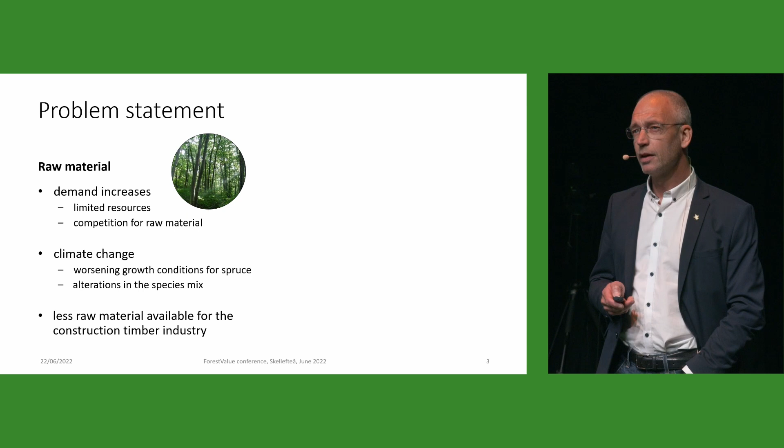So we may have less raw material available for the construction timber industry. That gives us a motive that we need to do the production very efficiently. On the other side, at the sawmilling side, we see it's more and more popular. We need a very good description of the material. We see also that almost all products going to the construction timber industry are required to be strength graded. And all in the area, we would like to produce it as efficiently as possible, of course.

Something not new, but growing year by year: we have been better and better in characterizing and measuring already at the log level with new modern techniques that we will use in our project. You will see that. So we will have data very early in the process when producing planks and boards. And as I said, the branch may need to look for alternative species also.

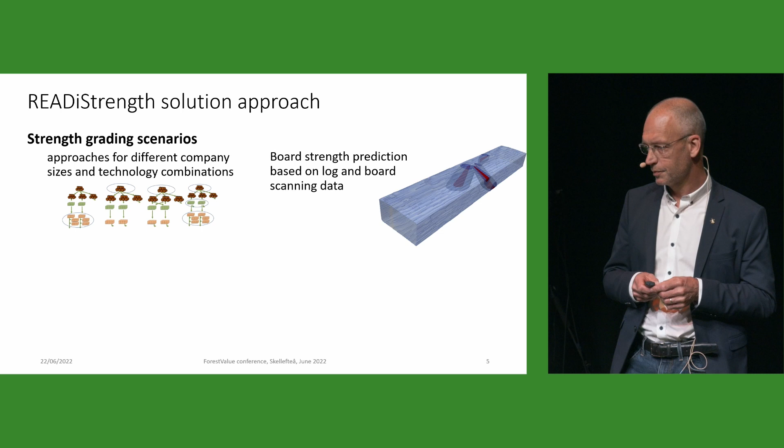So that is important. Our approach: we have looked through the arena of strength graded production of such products, and we will hear Anders talk later on a little bit about different scenarios, how to do this to make it more efficient, so that it should suit different sizes of companies. And our bearing idea is to strength grade early in the process, with the aid of such techniques as 3D scanning, acoustic scanning, discrete X-ray already at log level, and computed tomography.

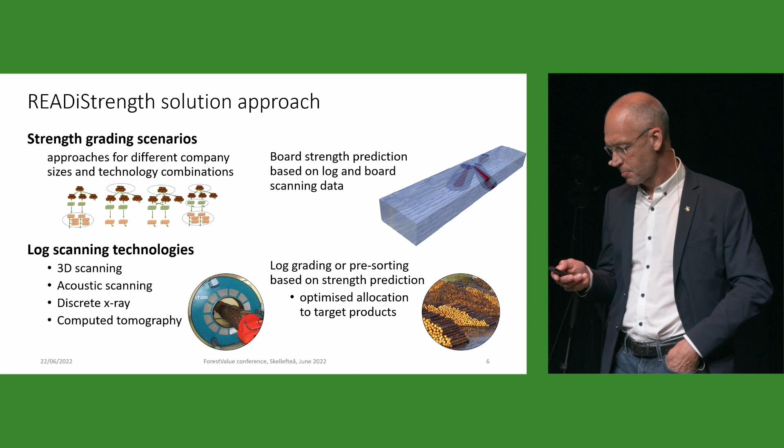So our main idea is: can we already at log level predict the outcome of the boards coming out from that log, the strength of the sawn timber? In that way, we think we can save material.

Just something about our data collection. It's a huge data collection. You don't need to understand this, but we started from the very beginning with logs, marking, and so on, and followed the production chain through the sawmill, even to the final product, and then strength tested it. And we made it in a way that we could keep the full traceability, that we knew that exactly this board is coming from that log, and that log has got those properties, and that board has got these features suitable or unsuitable for strength graded timber.

Just to get a grip, we had in total 420 logs followed, not on 2 continents, but up in Scandinavia and Central Europe, divided. In all, we had 1,200 boards. We had a similar distribution on 4 species. Of course, we had Norwegian spruce, the popular one, but also Scots pine, Douglas fir, and silver fir.

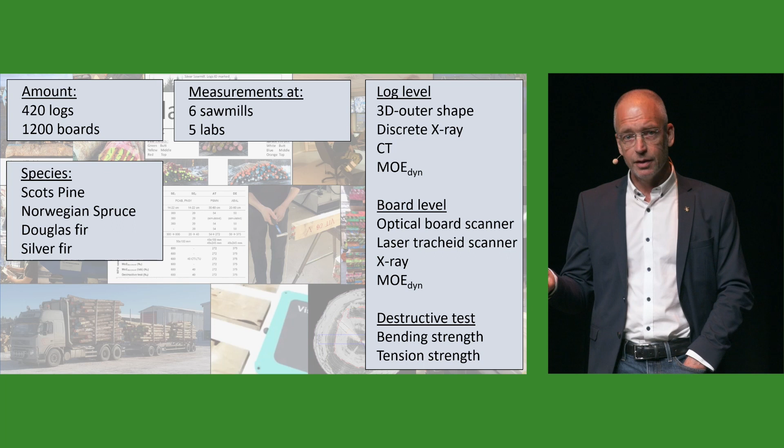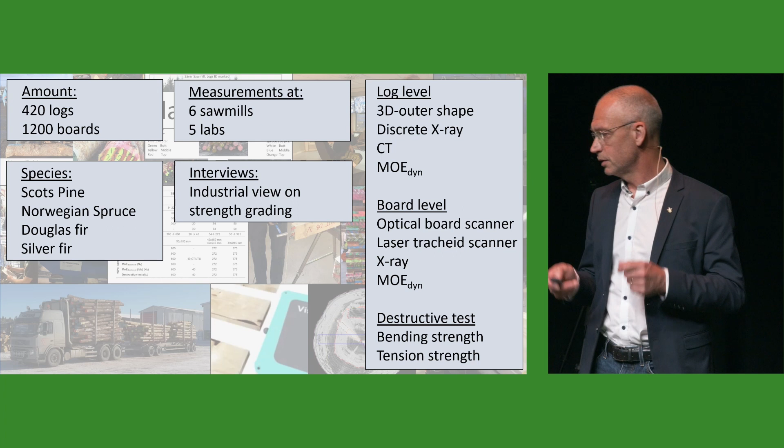In Central Europe, we had tension strength tests, and up in Scandinavia, we had bending strength tests due to practice on our market, so to speak. We also did interviews with the scanner supplier companies and also with sawmills about their thoughts about the future, and that is compiled in 2 reports at RISE. Recommend to read.

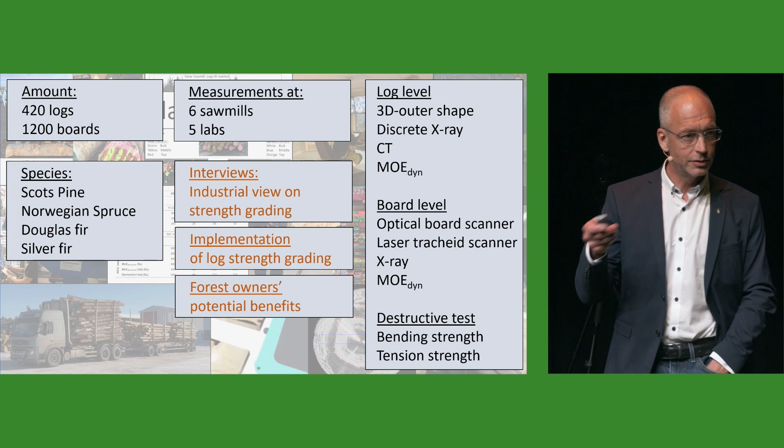What is coming next? Yeah, we will have the industrial perspective on strength grading in the next presentation. We will hear something about the implementation. Hopefully you will understand what we are thinking of doing here. We will hear something about the forest owners, how can they benefit from this? But in the second part of our project presentation, we go a little bit deeper and present also the prediction results and our attempts to show if it's possible or not. Yeah.

Then I give the floor, actually it's a recorded presentation by our industrial partner, Johan Oja. I hope it will work if I press on the...

Hello, my name is Johan Oja. I work as a technical manager at Norra Timber, the industrial part of Norra Skog, the Forest Owner Association in northern Sweden. I also work part-time as associate professor at LTU. Today I will talk about READiStrength, industrial need for more efficient production of sawn wood for structural applications. And even though I'm not able to participate at the conference today, I'm glad to have the opportunity to give this presentation in this way instead.

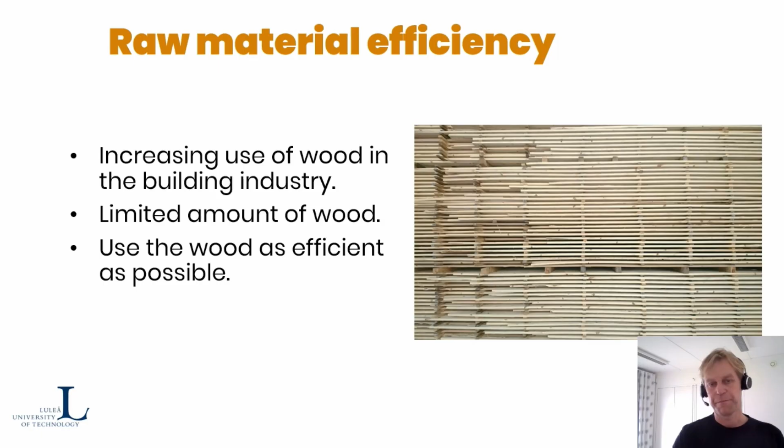So the background for this project is the need for raw material efficiency. We have an increasing use of wood in the building industry, and we want this to increase even more to exchange concrete constructions to wood constructions. But we also have a limited amount of wood, and that means that we have to use the wood as efficiently as possible, of course. The problem when we want to utilize wood in an efficient way is that wood is, as you know, a biological material. That is, we have a huge variation of properties. Every log, every tree is unique, and thereby we have to find the best way of utilizing every single log.

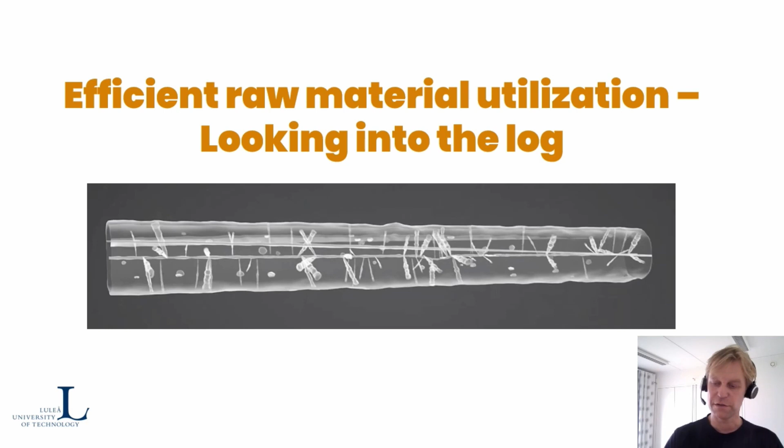And the example of how we can make money from this is that we can look at the potential dimensions that we can cut from the same log. We say that we're able to cut dimension A and B. They are both geometrically feasible for this size of log. But if we cut dimension A, the customers want high strength material. They want it dried to low moisture content, and they can pay a really high price if they get this value. But if it's a reject, if the board doesn't have this high strength, then we have dried it to low moisture content, and we don't have a demand for this dimension with low strength.

For these logs, it would have been better to cut dimension B, because here we have a standard quality that fits most of the boards in this log class. We can dry it to normal moisture content, and we get a decent price. And for the reject, we get a lower price, but we still have some demand for the reject. So what we would like to do in the sawmill is to find the logs that will produce the high strength and cut dimension A and dry it to low moisture content. And the other logs we would cut dimension B and produce standard and reject. This would give us the best value.

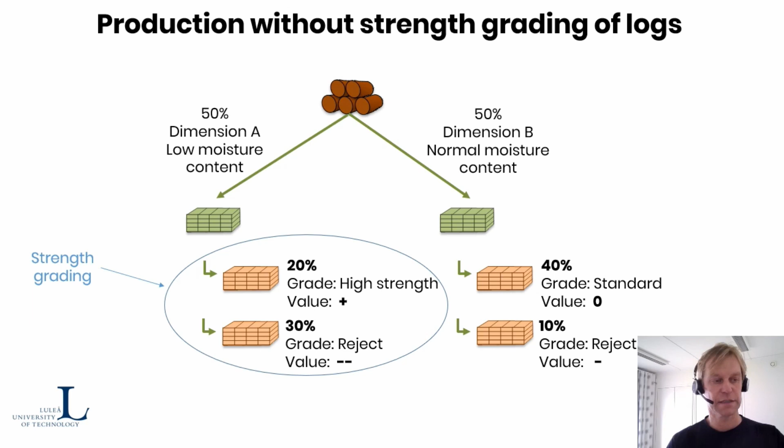And this would be in a typical situation where we would cut 50% dimension A, 50% dimension B. You can see from dimension A, we get 2/5 of high strength, and the rest 3/5 of reject. And for dimension B, we have 4/5 of standard and 1/5 of reject. This means that even though 40% of the total volume has high strength, we only get 20% out as high strength lumber.

But if we're able to perfectly choose the high strength logs, we can find these logs, which is 40% of the total amount of logs. We strength grade those logs and are able to cut dimension A. And then we will produce only high strength value for these. So we get 40% instead of 20% of the total material as high strength, high value material.

And the rest of the material, 60%, is cut to dimension B, where 48% of the total flow will become standard instead of 40 as before, and 12% is the normal reject in dimension B. In total, this will give a much higher value with none of the lowest value, the reject in dimension A, and a high amount of high strength lumber in dimension A, giving us a much better value, much better utilization of the logs. And this is what we have tried to achieve with the READiStrength project.

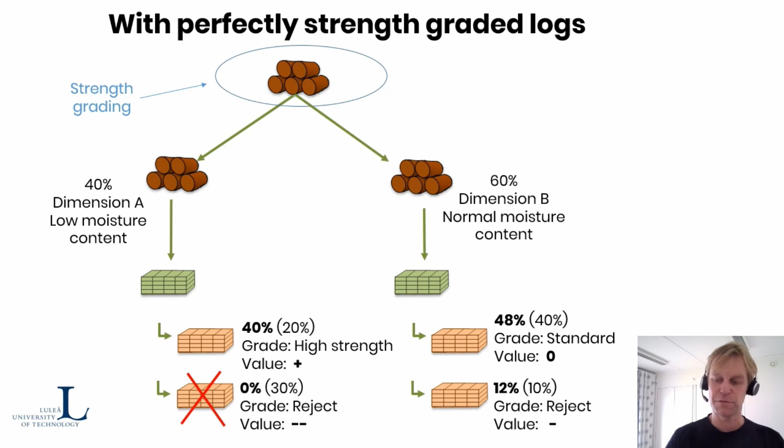And that explains pretty well, I think, that if we can use that information already at the log level and predict the strengths, then we can save material. And now I try to have some small dialogue with my experts here in the sofa. Anders Lycken from RISE, where are we now concerning these different sawing strategies and strength grading strategies? I know that we have worked with it, and you will try to explain a little, because it's not that easy for newcomers. Yes, I'll try to explain very briefly how strength grading is done today and how it might be done in the future.

You can see here that in traditional strength grading, you pre-grade the logs according to length and diameter, and then you saw the logs into boards. You have a green sorting where you sort again to dimensions. You dry it, and you have the final sorter where you do the actual strength grading. And then, as Johan said, you have a lot of rejects, but that's how it's done.

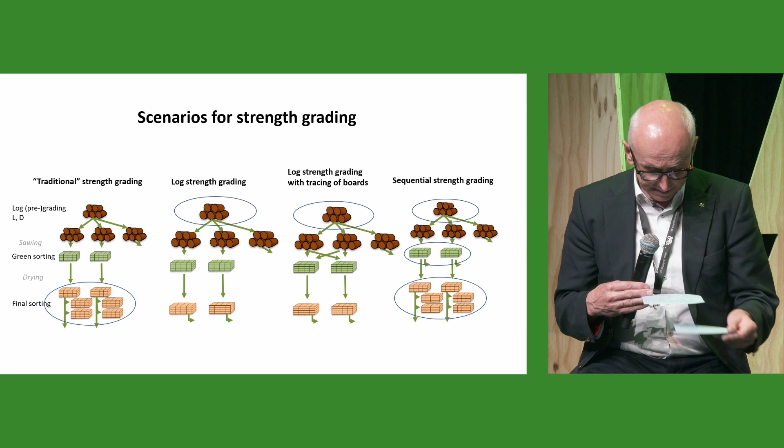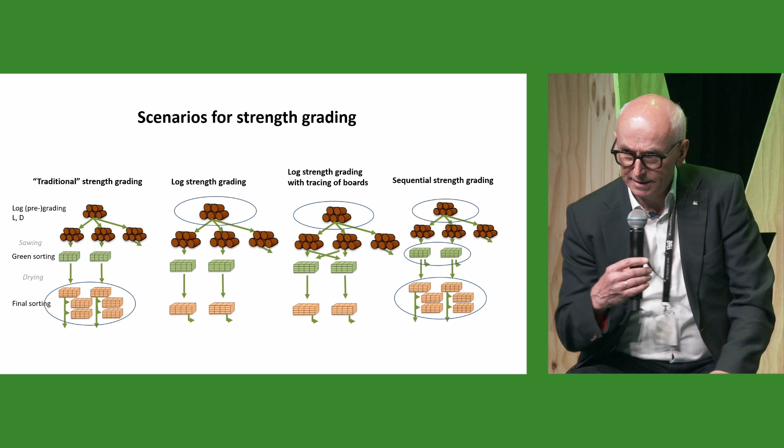And the last thing, especially for me, with a long experience in that, is very important. From my point of view, it is very important and necessary to implement a kind of neutral resource quality determination after felling, but before sawing the log. And I'm referring to the system which is already established here in Sweden. You are lucky guys, and this is not yet the solution in Middle Europe, and we have to implement such a system. And the reason is pretty easy. Otherwise, we cannot really expect that the forest owners will react as we expected.

Thank you, Udo. So to summarize, if the sawmill is doing it better, more efficiently, they earn more money and they can then pay the forest owners. And that was not a question. Sure. Just a comment.

Andreas Weidenhiller, HFA in Vienna, Austria. You led the Austrian part of READiStrength. Are these options that have just been discussed also interesting for you in Austria? What is the situation there? Yes, definitely these options and scenarios are also interesting for Austria. I don't know if everyone is familiar with the fact that Austria, despite being a rather small country, is one of the biggest producers of sawn timber in the EU, together with Sweden, Germany, and France.

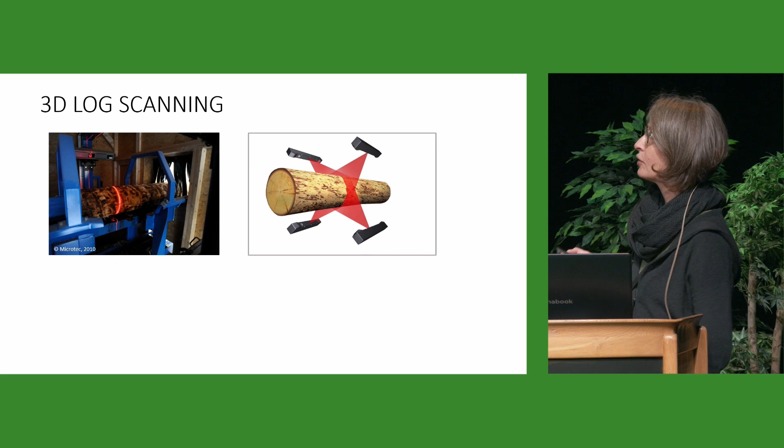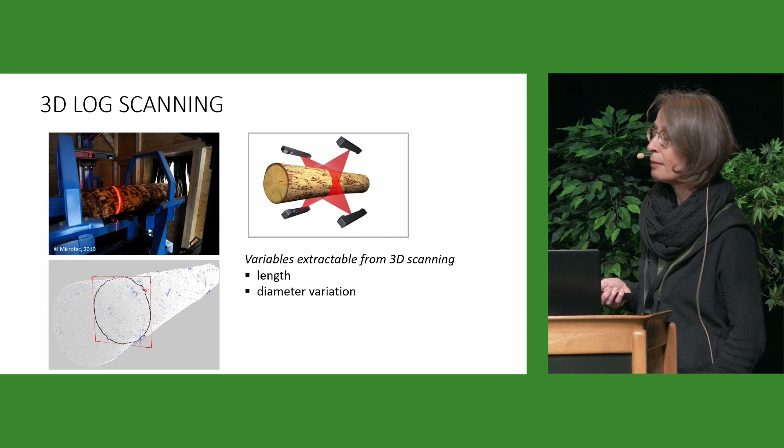So the first one, very widely used in the sawmilling world, is 3D log scanning. The idea is that the log runs through a frame. We have either a light curtain or laser cameras, and from these measurements we extract a point cloud describing the outer shape of the log, and from that we can extract variables like length, diameter variation, and from that taper, ovaliness, bumpiness. So it's the outer shape as such which is described.

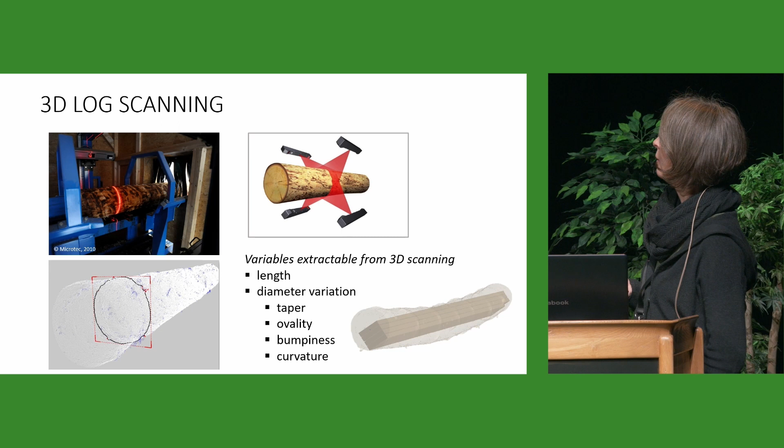And having that shape, that geometry, we can then put the boards in there and draw relations to the strength measurements that we've done on the boards. So each board I'm talking about had been destructively tested, and tested also for density and for MOE.

So the second technology, which is more used here in Scandinavia, and I don't actually know of any installation in Central Europe, is discrete X-ray log scanning. So again, the log runs through a frame, and we have 1 or 2 X-ray sources installed, and what we receive from this technology are kind of silhouettes; for each of those two sources, we receive one of those two-dimensional representations.

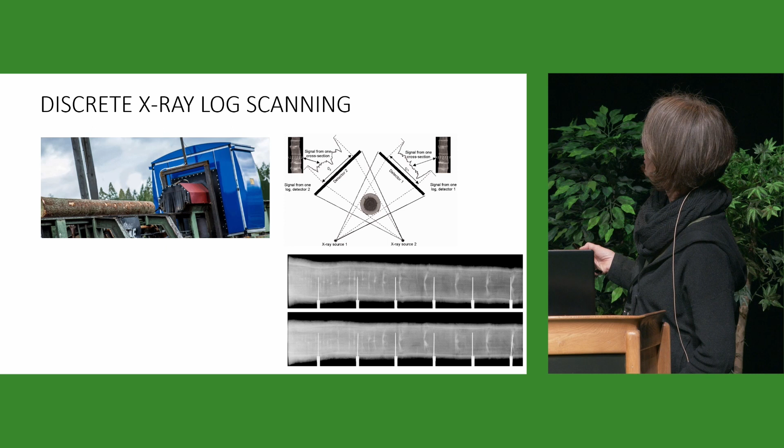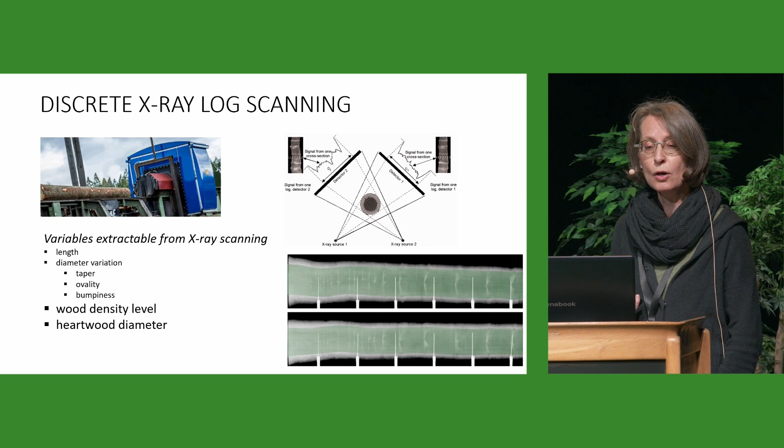And from that data, again, we can extract the geometry of the outer shape, but we also receive information on the wood density levels. And wood density is very closely related to strength. So the information that we gain here is already very important, because we do see some patterns in the distribution of density. So we can extract heartwood diameter, for instance, or the position of whorls or knots and their sizes.

If we then go further into technology, that is the most advanced technology that we were able to use, and there are about 10 to 12 installations worldwide of that technology. And so we are lucky to have one here in a sawmill, and in Freiburg we used a prototype which is actually a little bit of the basis of these industrial installations.

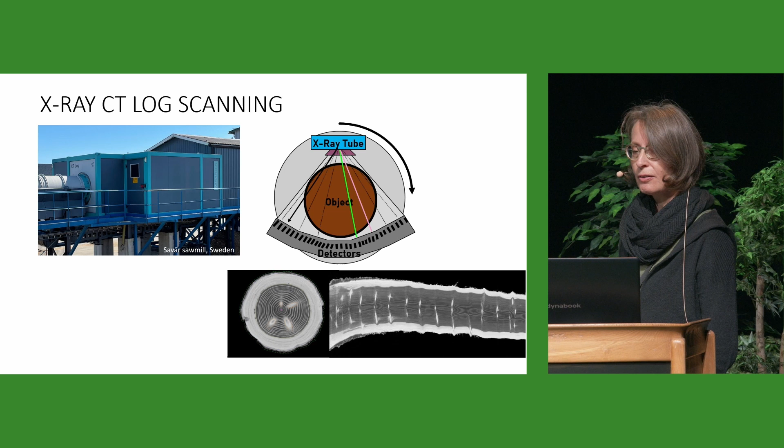So the difference to other X-ray based technology is that we have an X-ray source which actually travels around the object while the log is moving, and the result from that is not only one or two planes which we are looking at, but we are able to look at several hundred individual planes, which are then recalculated to a proper 3D representation of the log internal structure, as you can see here in the cross-section or in the axial length. And from this, again, we can extract all the external data.

We can extract the wood density level in much more detail, as I've shown in the image before. So we can find the actual precise position of knot structures. We have information on the status of knots. So the level of detail of information is higher than with the previous X-ray based technology.

So we collected a lot of individual parameters from each of those three technologies. In Sweden, statistical approaches based on partial least squares analysis have been applied. In Germany and Austria, we used a different approach, generalized linear models, for the modeling. All the data sets have been split up, as you would do when you build models, into training data sets and test data sets, with 10 replications. And I would like to present to you now just the model qualities which we can achieve from the different technology concepts. So that's the example for Norway spruce.

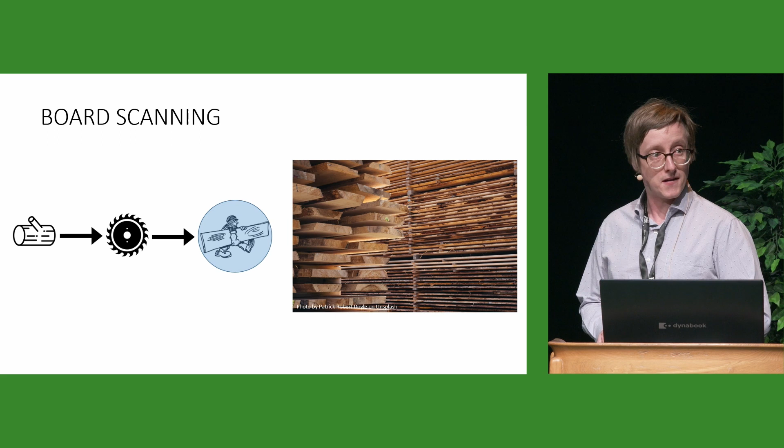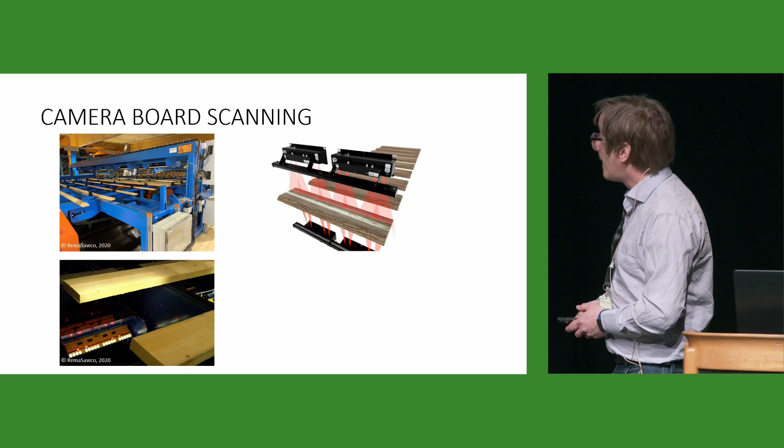And as we said in the beginning here, this is where the strength grading usually takes place, where we have the sawn boards, and in our case also the dried boards. And we don't want to talk too much about how it's done today, because that's not very interesting from a research perspective, but we will talk a little bit about the technologies being used, since this is where we have based our data collection on. It's these type of scanners.

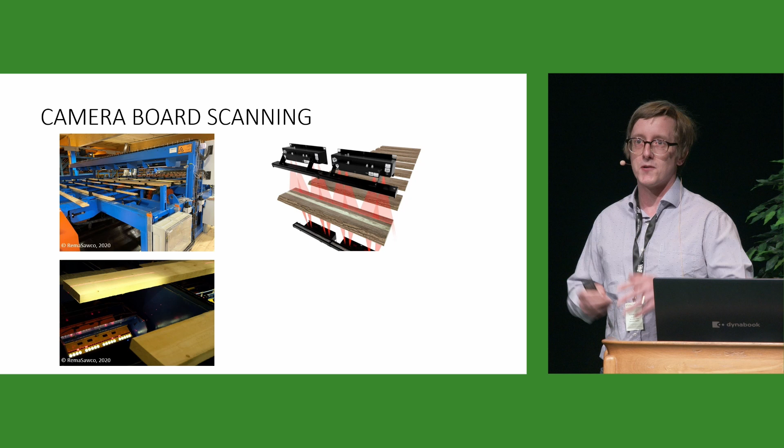One type is you use camera board scanning to run the boards through a frame with cameras on top and below, usually. And you have projected laser lines, so you can do laser triangulation and measure the shape of the boards, and the cameras pick up the RGB channels, so you have basically a picture of the board.

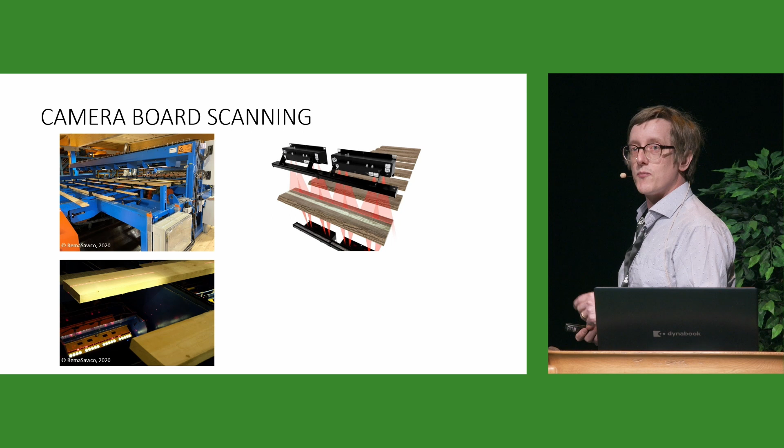And I'm not sure how visible it is here, but if you project laser points in a line, you can also measure the fiber direction of the board. Because the laser light will propagate in the fiber direction, so you will get kind of elliptical laser dots, and you can measure the shape and the direction of these ellipses, and you can tell something about the fiber direction, which is of course very important for the strength.

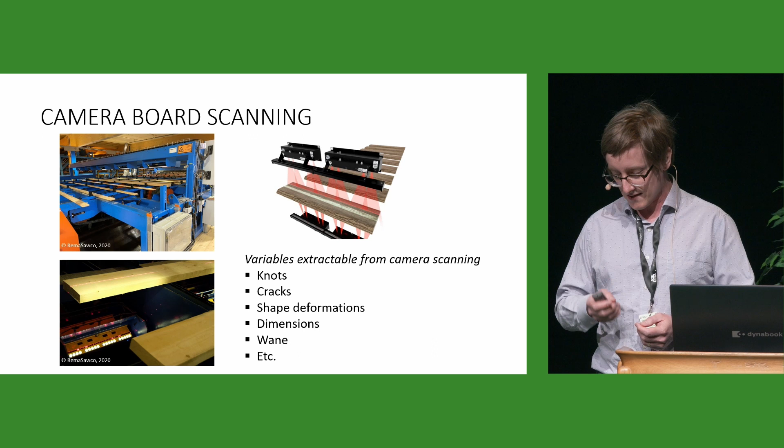So a few things that can be measured. There are a lot more characteristics, of course. Not all of these are relevant for the strength as well, but these are some of the examples. I mean, knots and the fiber direction, I would say, are the most important things here when it comes to camera board scanning.

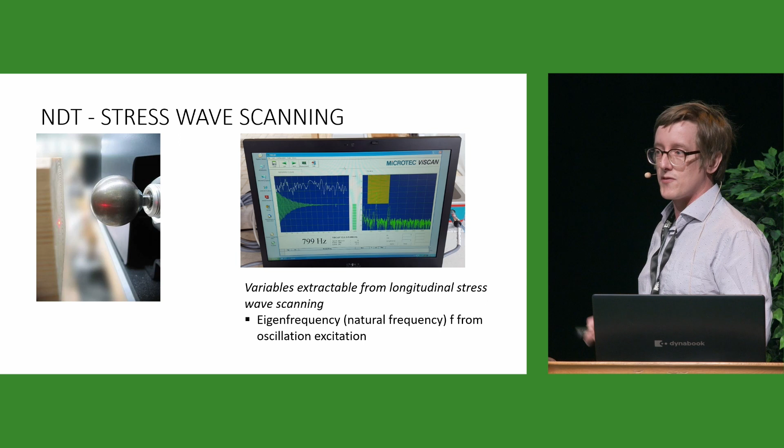You can also do this stress wave scanning, where you use kind of a hammer to knock on the side of the board. Most of you know this. So you can measure an eigenfrequency of the vibration, and if you also know the density of the board and the length, you can measure these in some other way. You can measure the length quite easily with a laser scanner, for instance, and for the density you could use scales and measure the volume, or you could use an X-ray. Then you have sort of a function deciding the modulus of elasticity of this board.

And we also have X-ray technologies on the board side. For instance, we don't have an image of this, but you can of course scan the board as well to get X-ray data describing the density and the knot information and so on. So that's already known technology, so to speak. It's in use in many places.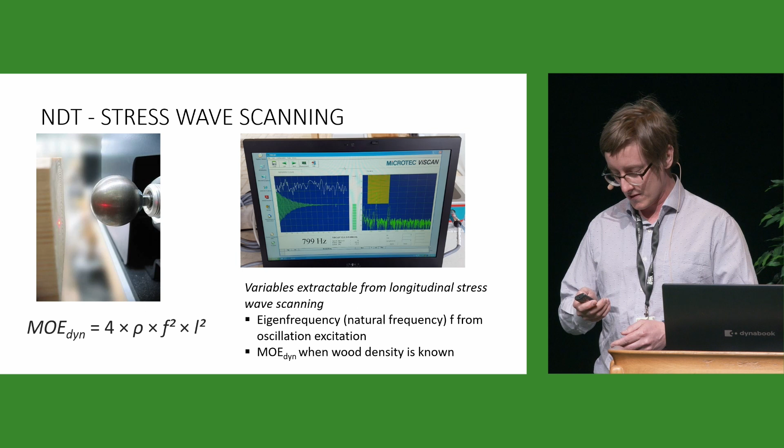So what we wanted to do is look at what is coming now in the sawmill, what is kind of the forefront of technology, and we described it a little bit in the beginning of this presentation. If we can have traceability and actually combine technologies from different parts of the sawmill, because the difficulty in a sawmill is often that the material gets jumbled about, it gets sorted, it gets resorted and so on for various reasons. Especially for the drying, you have to basically resort the material to have an efficient drying process. So it's very difficult at this stage.

Let's see, where is it? Wrong button, sorry.

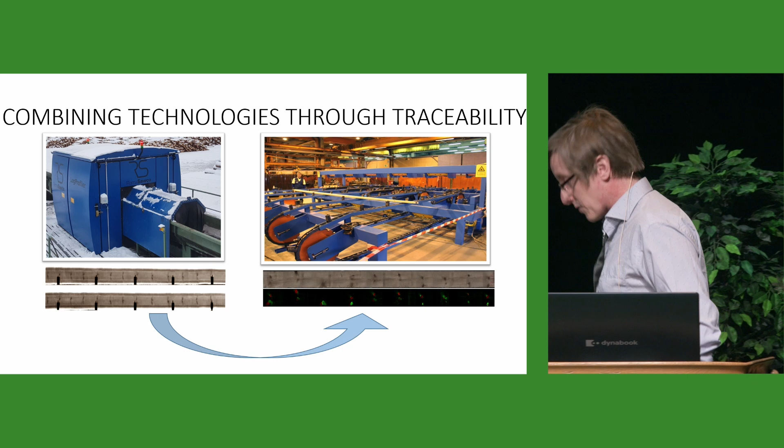At this stage, where you have the board, it's very difficult to know which log it came from, because you can't really keep track of the pieces. But what is being used in a couple of sawmills at the moment and being installed in more and more is this fingerprint traceability technology where, if you have an X-ray scanner for the logs, you can see these vertical darker areas which correspond to the knot whorls in the log.

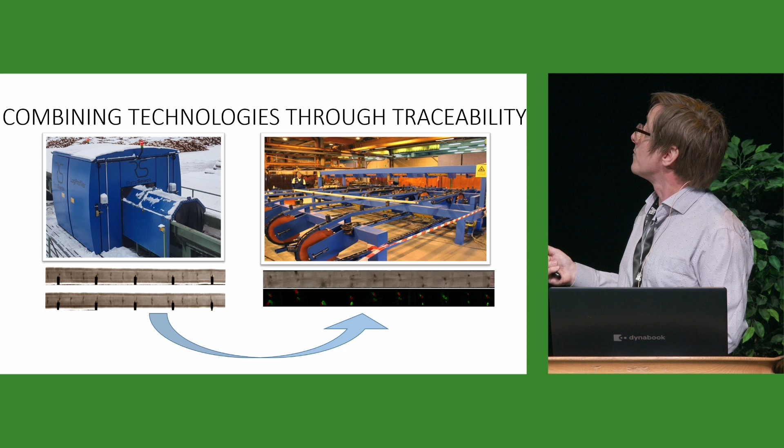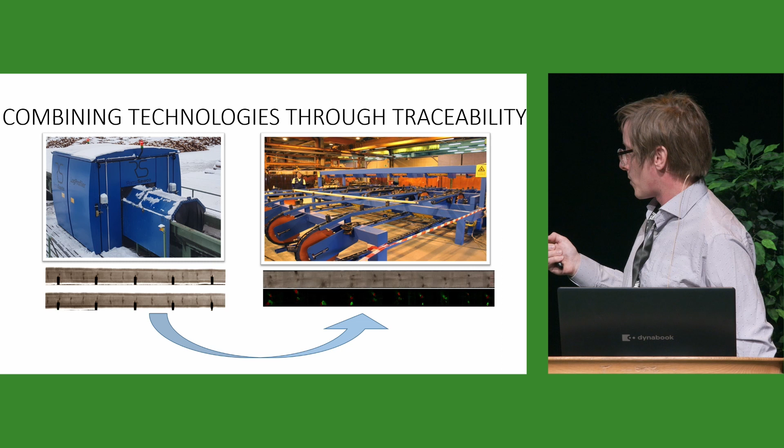And you can use this to create kind of a biological fingerprint of the log. And you actually measure basically the same thing on the boards later. You measure the knots again, and you can create a similar fingerprint, and you can match this to retrieve the information at the board stage. And we wanted to see what we could do with this, and the idea was if we can feed forward the information from the log side when we do the prediction on the board side, can we improve it? That's the question.

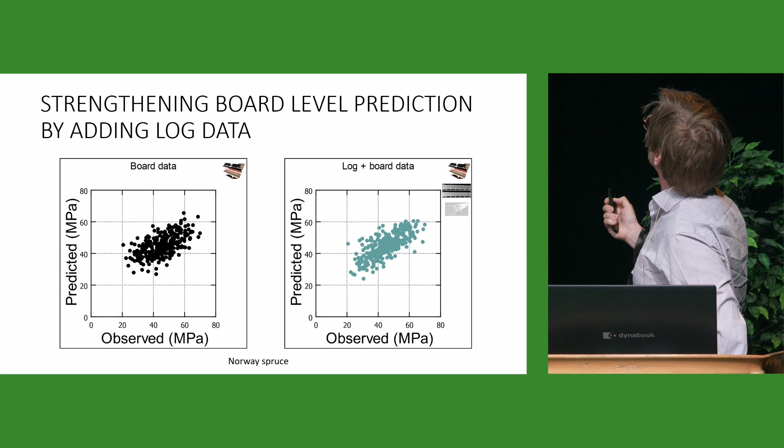But if we think that we can trace the board back to the log and add the log information, because then we have taper, for instance, and we have things that indicate the log type, if it's a butt log or a mid log or a top log, or we have other things. In this case, we also add the density from the X-ray scanner. Then we can see quite a large improvement in this cloud. So in this case, we have added the X-ray and 3D data from the logs.

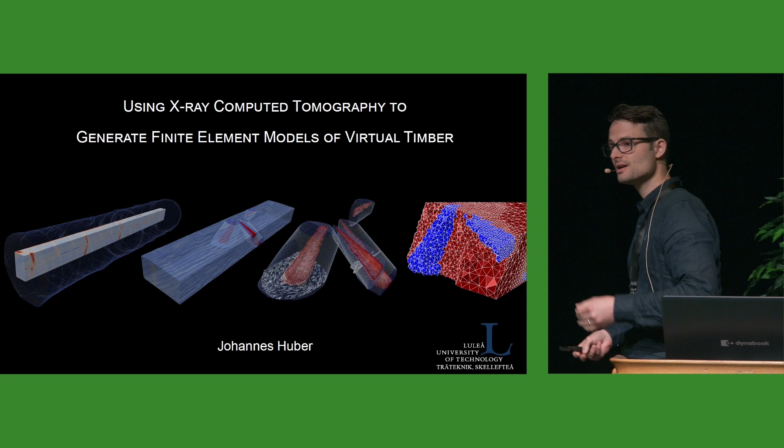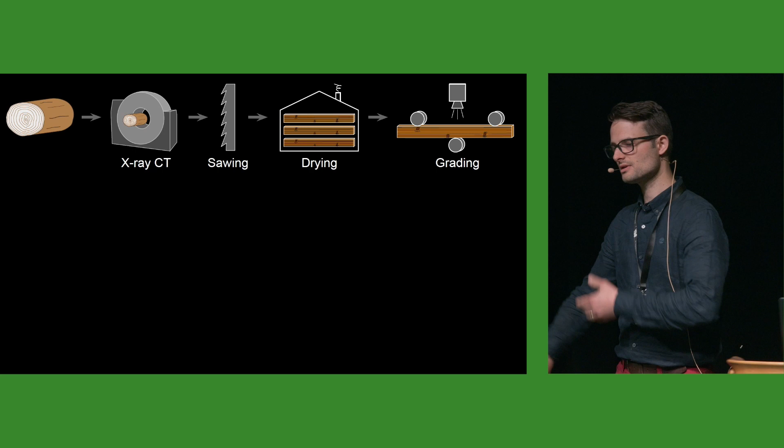And I was going to talk about using X-ray computed tomography data, so it's the one you know from the hospital, right? To generate finite element models of virtual timber and then predict certain properties. So this is what we envision in a perfect scenario here. We have a sawmill process, very simplified. The log comes in, we scan it, we saw it, we dry it, and so on, and then we do some grading. And nowadays, this grading is based pretty much on statistical models, statistical correlations to predict certain mechanical properties.

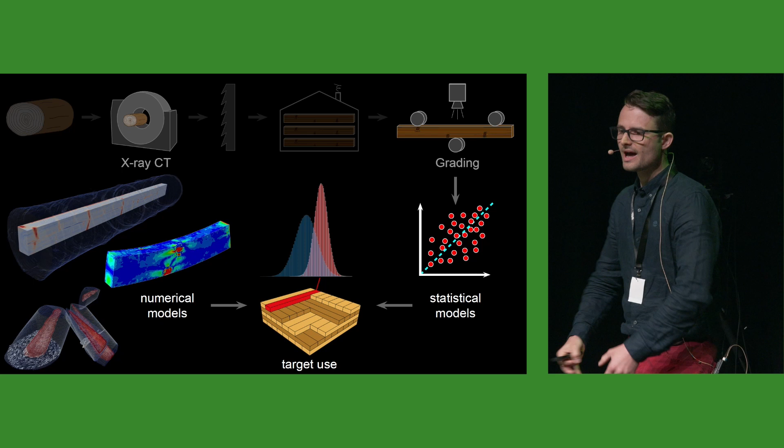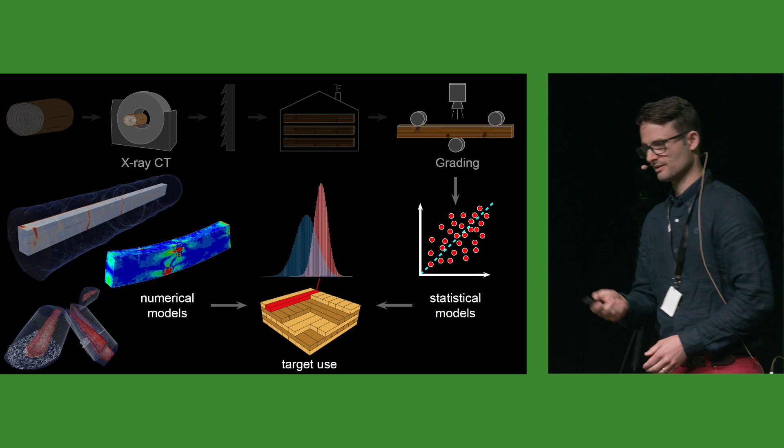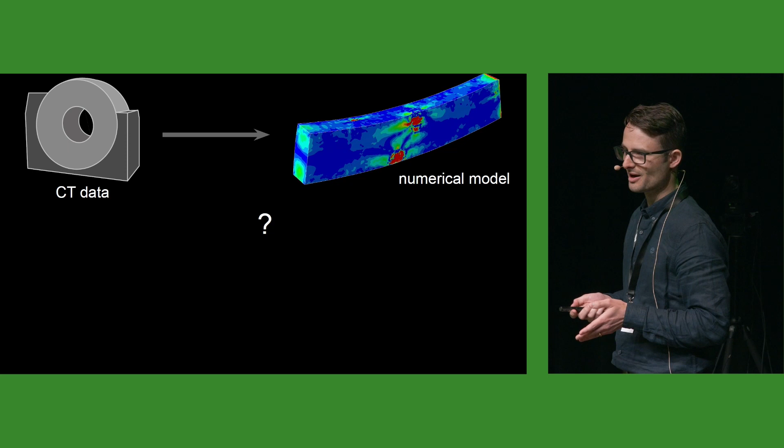My vision is to use the plentiful data we gather in these X-ray CT scans, add some computational mechanics to it, and produce numerical models that could predict certain properties of the planks to improve our grading and maybe one day even say a target use for that specific plank. The main question in this project has been, how do we get from CT data to a numerical model? I have not read anything about that. And why do we do that? We want to predict, at least in Sweden where I work, the bending behavior of the board or plank.

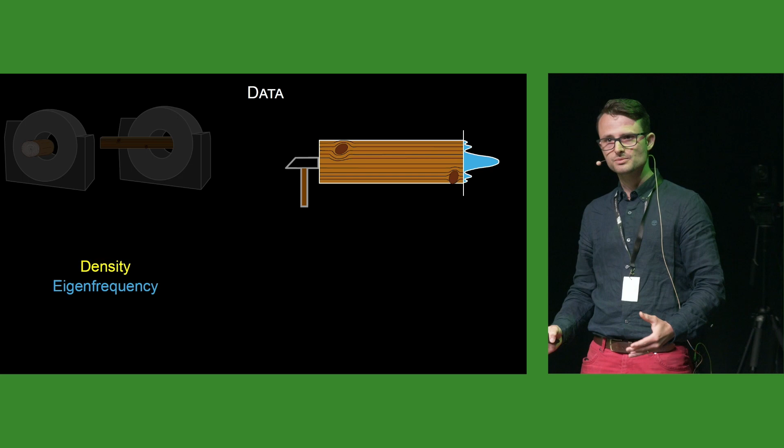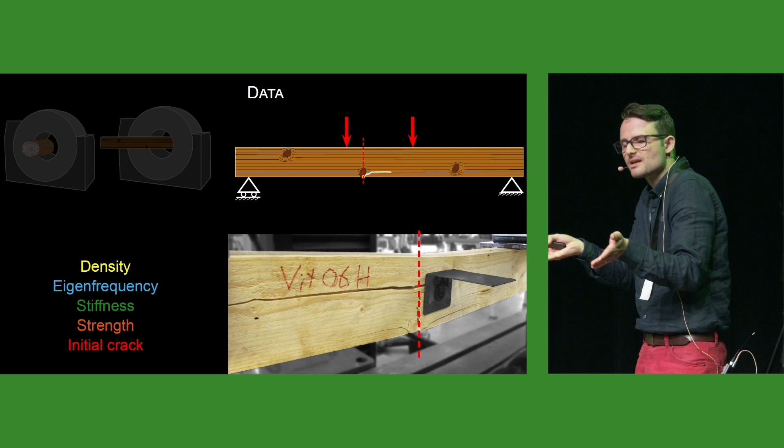The data we have collected has been a subset of the data you've seen before, where we did log scanning and board scanning at the scanners some of you have seen in our facilities at LTU; the gathered data consisted basically of density images. We also did some eigenfrequency measurements with hammers on the planks. And then we subjected them to 4-point bending tests, where we measured stiffness, strength, and also the location of initial crack initiation, at least an estimate. We didn't have any high-speed cameras, but we could estimate it from the observations in the lab.

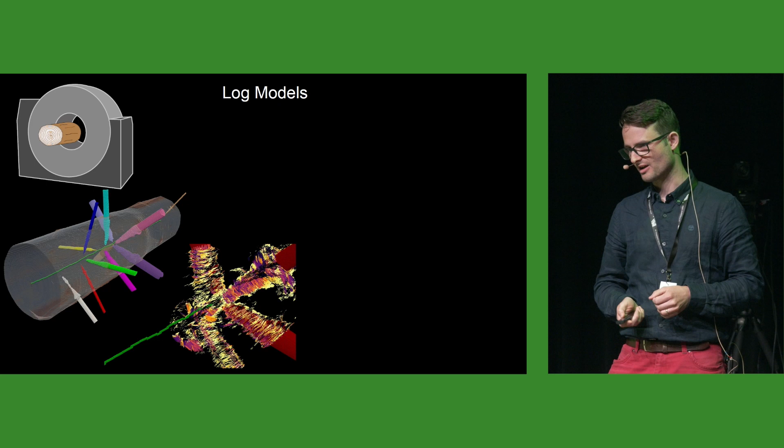What I've mostly worked with during these projects is to generate finite element models of scanned planks, where I reconstructed the pith, the annual rings, the knots, and the fiber deviations around the knots, made a finite element model out of it, and did the bending test. Lately, and it's not really part of the project anymore, I've also progressed into doing the same thing for logs, for the log data before sawing. And that's what I'm going to show you today, because I think it's most fun. I reconstruct the knots again, the fiber deviations, and did some models in Abaqus to predict. So let me take you on that journey.

First, we start off with CT data. So that is voxelized data. You all know what a pixel is. A voxel is a 3D pixel, if you want.

In this case, we have voxel sizes of approximately 0.68 times 0.68, and then it's been interpolated to be 0.68 in the third dimension as well. We start off with this cube, really. I remove the air. The blue one has been air, low density, just by segmentation, and we have an image of the log. You can see the high density in red, the low density in blue.

You see an initial problem already here. There is a lot of water in the sapwood there, which will obstruct our views in later steps. But I have found a very simple procedure by a thresholding method called Otsu for certain parts of the histogram to just filter away the sapwood and look only at the heartwood, where we can see the different features much clearer.

I calculate the pith, or I reconstruct rather, the pith from the data by something called the Hough transform. It's an image analysis tool where you look basically for concentric circles and then follow along the log. And you see the green line here then is approximately the location of the pith. It's good enough for my uses.

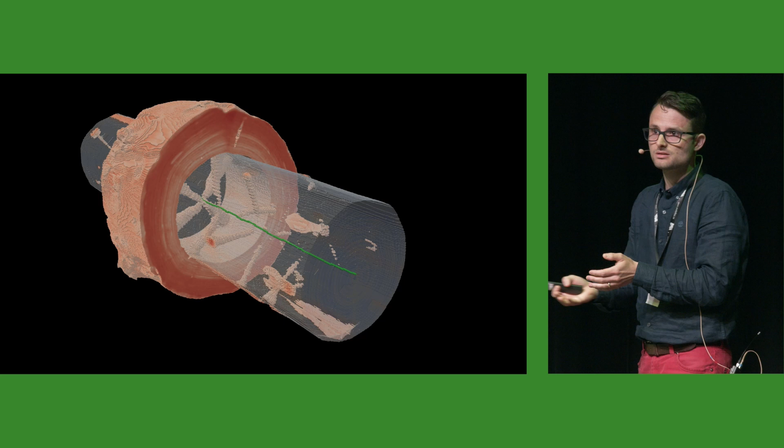The next thing are of course the knots. We need to know where they are. They are the biggest problem, obstructing the fibers and so on. What I do there is I do an initial thresholding of the data, so the high density is mostly knots and other disturbances. And I then go along and for each single object there, I calculate the principal axis of inertia, and I take the lowest. So that means I take the axis along which you would most easily rotate these objects around.

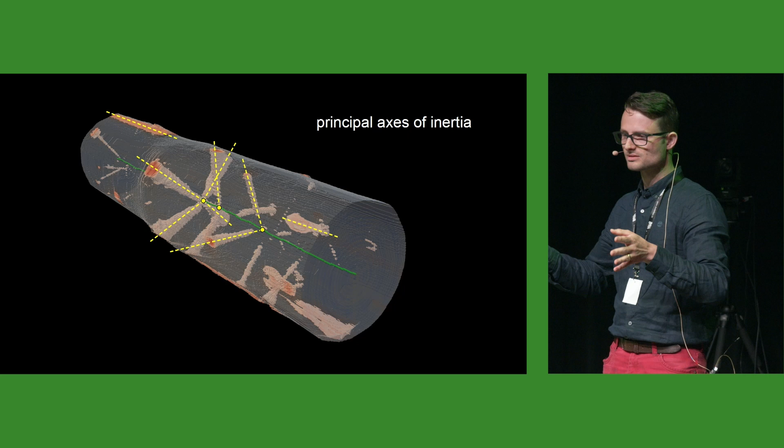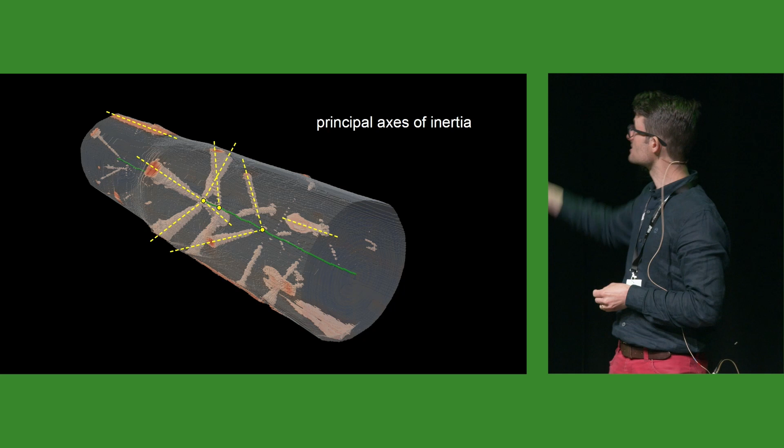And then I see where do these axes actually go, and where do they come closest to the pith, which would be the yellow points there. And according to some criteria, I then say, well, this is probably a knot, or this is not a knot. For example, this pitch pocket up there is probably, or it's actually water up there. It's not a knot. It's too parallel to the pith. I'm then left with these colorful objects here, the knots, which I have identified.

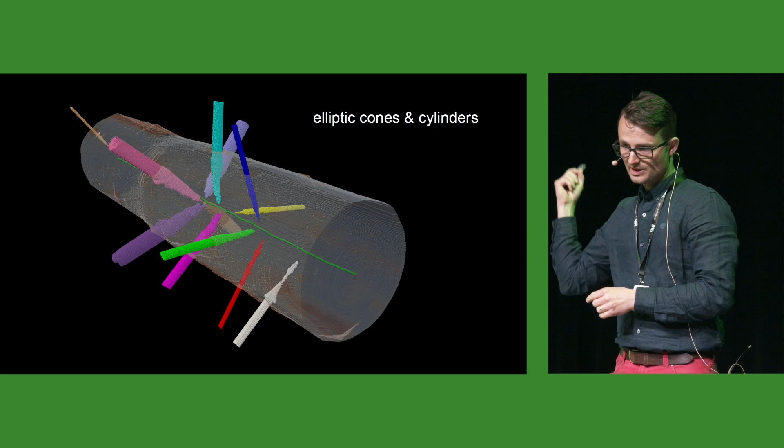And then I extend them out into the sapwood. And I do that because we don't see anything in the depth, or we see something, but it's really hard to discern different features in the sapwood because of the water. I use elliptic cones here and elliptic cylinders to shoot off into the sapwood. You can see it looks like this in the end. They come to the very surface as well.

The next step is then to go around the knots, or actually in the entire continuum. I will show you this for this knot group here. We color them red for easier visibility. And I use an image analysis tool called the gradient structure tensor, from which I use the lowest eigenvalue and see what's the eigenvector for that to give me the deviations around the knots. And this gradient structure tensor is based on the derivatives in each spatial direction of the density with some smoothing on it, but that's details.

And what it gives me is the longitudinal direction of this coordinate system I'm trying to find, right? I can show you some pictures. It flows around the knots. If we look inside the knots, it also follows the direction of the knots. We can look at it in a little bit higher resolution if you want, and fly around and see, okay, looks okay. They deviate around the knots.

And if you do some corrections and do everything correctly, you can actually plot some streamlines around them and see how the directions flow around the knot and dive into the knot from below and from above. Then you need to assume certain interaction between these directions in the knot and also among the knots with specific laws, some of which I take from a colleague that sits here, Markus Lukacevic, who did similar models for surface-based data of boards.

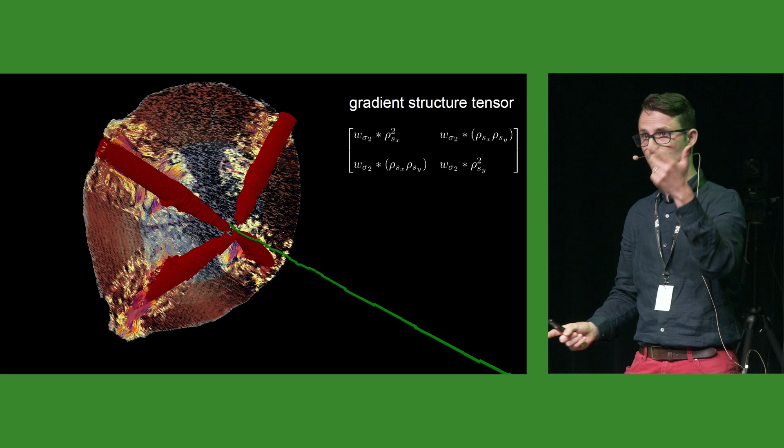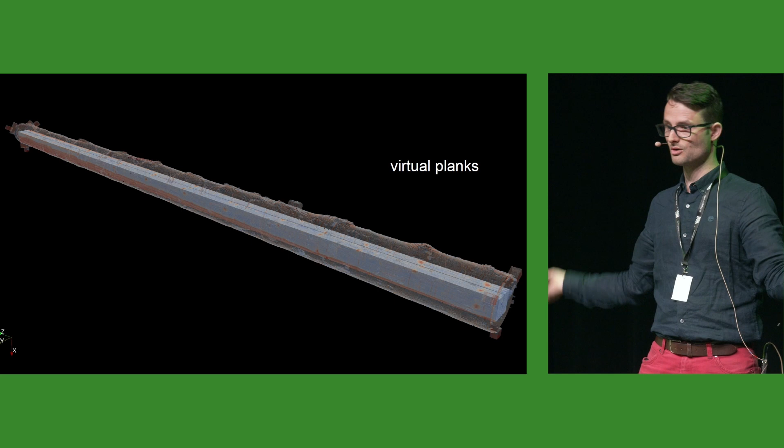I then go along and do the same thing for the slices to figure out the remaining two directions that I need for my fiber coordinate system. Now, ignore the areas around the knots, but look at the clear wood, and you see that you can easily find the radial direction pointing inwards towards the pith, the black lines here, and the tangential direction. And now I have all the directions in there, and I go ahead and cut out virtual planks from the logs.

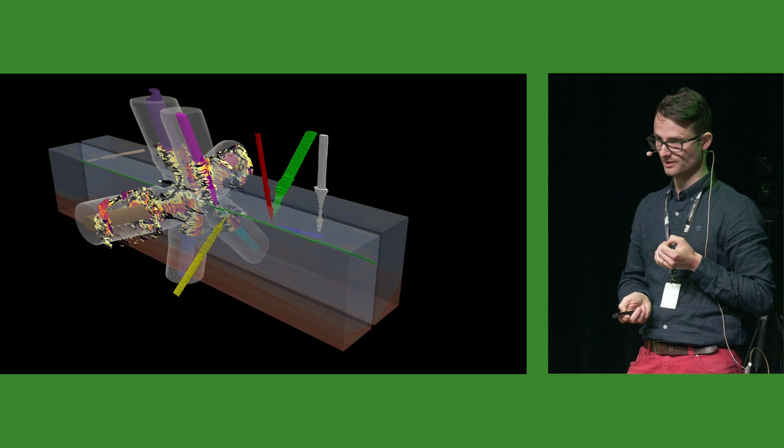And we can see that all the information that I have now reconstructed can be overlaid here quite easily. You see the knots and the pith and the fiber deviation around that knot group. What's then done is I have basically a continuum description of the fiber coordinate system. I call it a tensor field F here. And I take that for every material point, take it out. So it's this coordinate system.

I put on an orthotropic stiffness law that we usually use for modeling wood in a continuum. So it's an orthotropic stiffness tensor here that is based on the following law that has worked for me. It's a power law based on a certain reference stiffness tensor from the books, a factor kappa telling me if I'm inside or outside a knot, and the relationship of the measured density to a certain reference density up to a power P, which in this case was 2. And for the board models, I also used, just to check what happens, the measurement of the eigenfrequency.

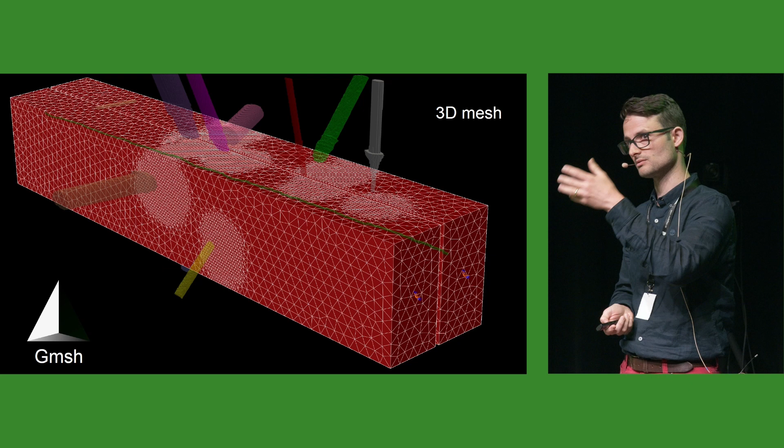So the hard part is over, then you do the discretization into a finite element mesh, and I do some refinement around the areas of the knots, because there I expect the stress gradient to be largest, and I expect the most interesting part of the simulations. Then I do a virtual bending test and can do different things with the results.

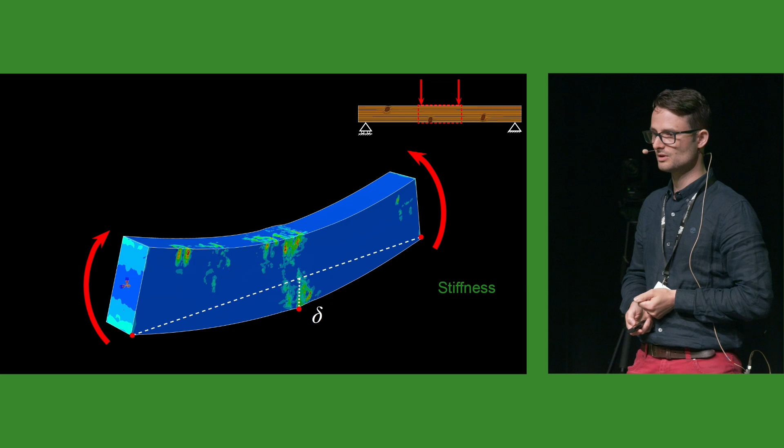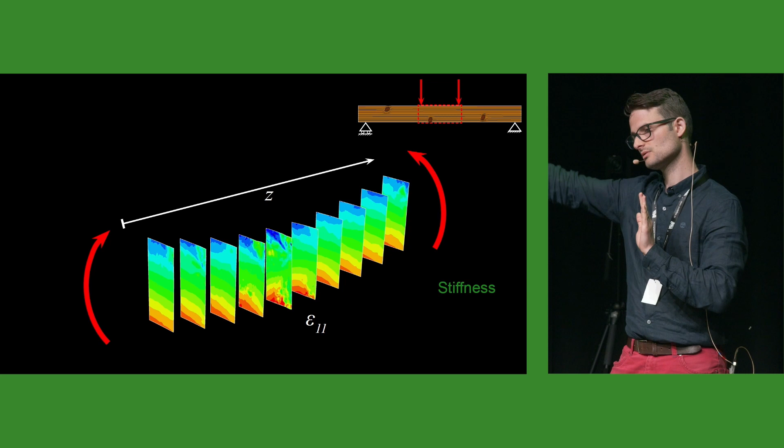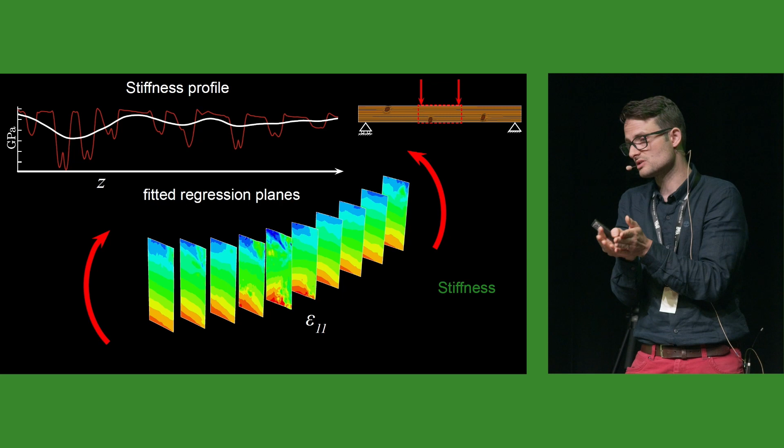For example, just measure the deflection to get an idea about the stiffness, or look at the longitudinal strain along that board, slice it up into certain pieces and do a regression on these slices to get a law how the stiffness varies along this board, which is the red one there, and if you do some smoothing, it equalizes out a little bit. But you can clearly see that it drops in certain locations, which is simply around the knots, right?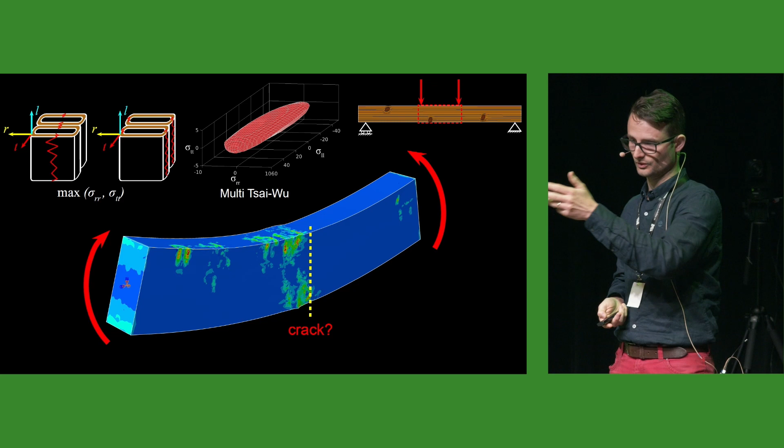Then I can also do some crack initiation, or at least I can predict where is the most likely position a crack would open. I don't do the calculations afterwards, how it really propagates. For example, I use the maximum stress law across the fiber, or I also tried a multi-Tsai-Wu surface. I also did some simplifications of this to see how they work.

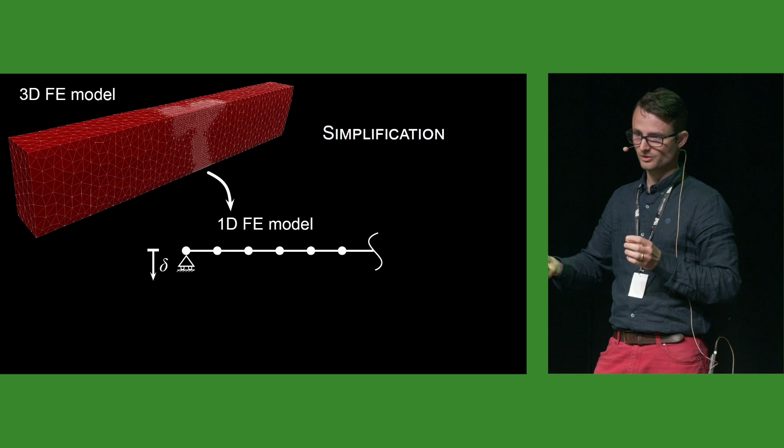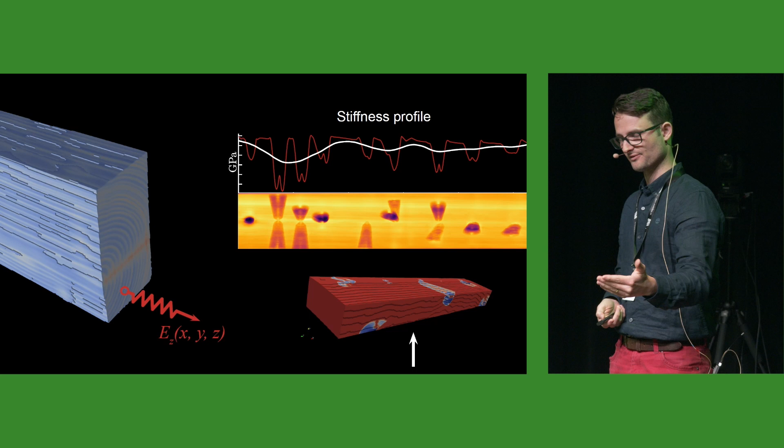For example, one-dimensional finite element models derived from the bigger ones, and also continuum models, where I simply reduce all the information about the stiffness tensor in every point to a uniaxial stiffness along the board, which gives me another continuum representation of this E z here, which you see falls down around the knots, and then do just some projections to get again this stiffness profile, but now derived from the uniaxial stiffness in the continuum. So I basically have 3 different models here to predict different things in the reality.

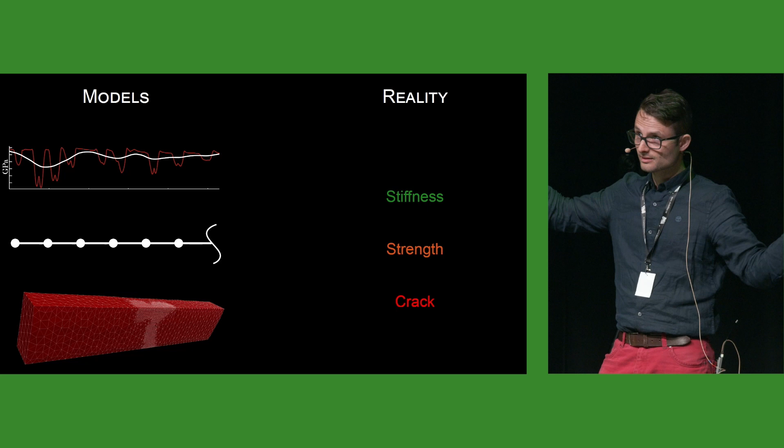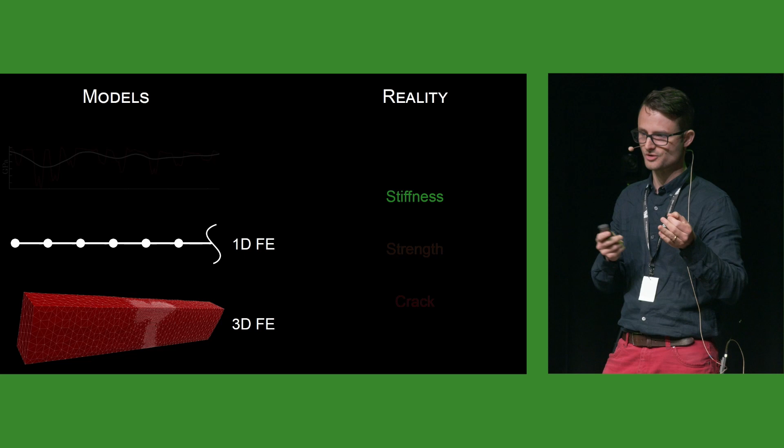What I can roughly say, because it's not based on a lot of different measured planks, I think 20 planks in this case of Norway spruce: it's possible to do it, number one, and number two, the finite element models were the most successful to do the stiffness prediction. These stiffness profiles were most successful to predict strength, and of course crack you can only predict if you have a 3D description of the continuum, where you have the full stress tensor and check, okay, what criterion could I use to predict strength?

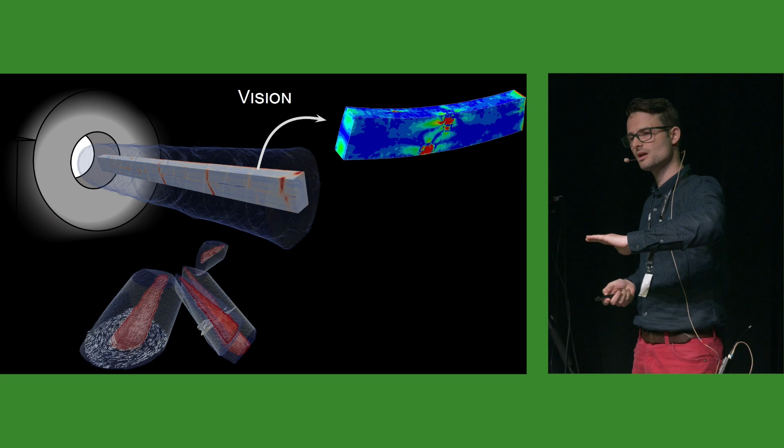And another thing, obviously, if you include information about the eigenfrequency, these correlations in the models get much better as well. But that's kind of a no-brainer. The more information, better prediction. The vision is, to summarize here, one day to increase this modeling in speed and have it in the sawmill live to look at different variants of cutting and predict the target use of a specific board even. That's the dream, at least.

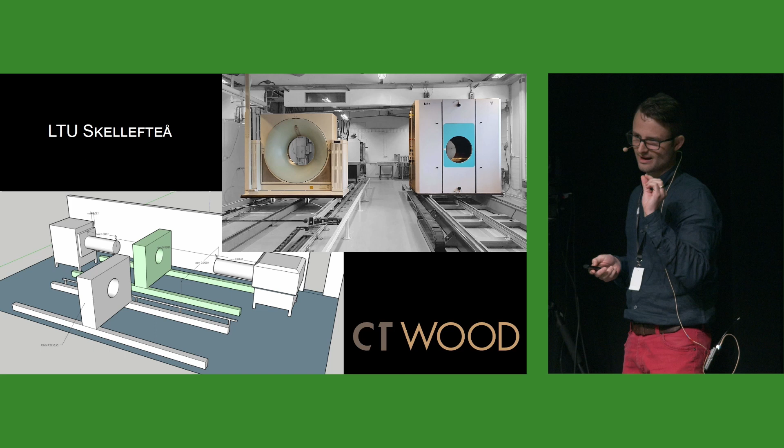A little bit about LTU Skellefteå now, where I work. All my work is also part of a big industry initiative called CT Wood. We currently have 2 different scanners, one medical scanner, a very new one, 2 years old now from Microtec, and to the right here, an industrial CT scanner that can operate at sawmilling speeds as well, and has an even higher resolution that I worked with. It's at 0.3 times 0.3 times 0.3 millimeters.

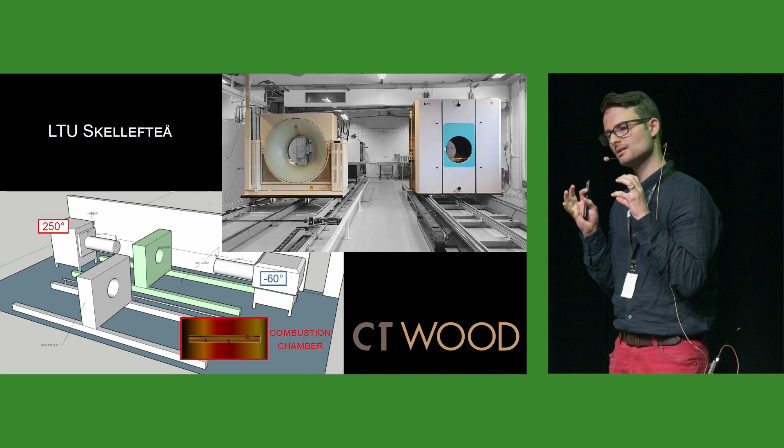We can analyze wood in situ at an elevated temperature of 250 in one of the chambers, and at -60 also to observe freezing phenomena in wood. So we do that while scanning. And we are currently designing a combustion chamber as well, where we will be able to study the burning of wood and CT scan at the same time. And I would like to develop some models for that in the future.

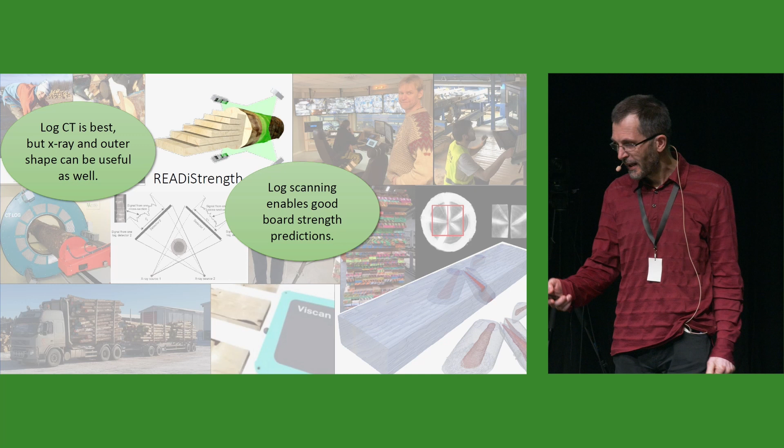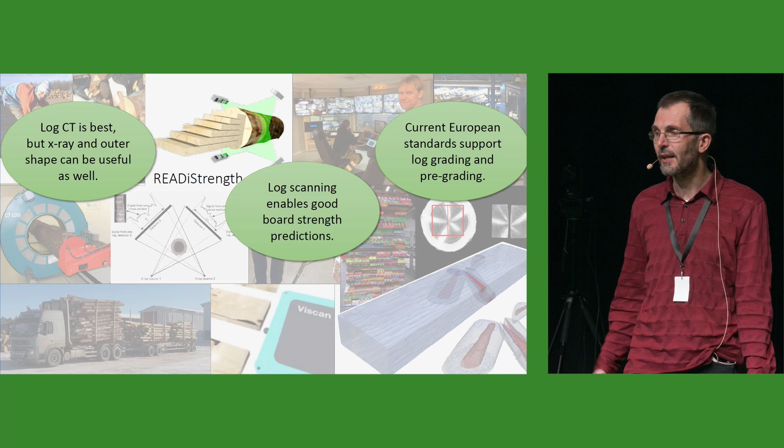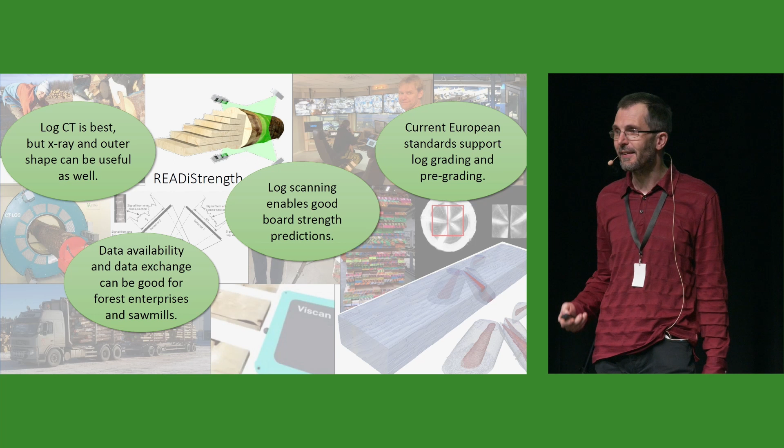Thanks to the explanations of Rune, we can also say currently the standardization does support log strength grading, log pre-grading, if you know how to do it, if you do it correctly. So we can actually start trying this out in sawmills in actual production. We have expressed the hope that this kind of data that we are using and the models we are using here can benefit both the forest enterprises and also the sawmills, so that we can grow together in this value chain.

And especially what Johannes told us at the end is, okay, there's even more that we can do. So partly it only depends on computing power, so that we have actually the speed and the power to do the calculations, so that we look into the future and say, okay, as computing power increases, we can get even better predictions and even better models.